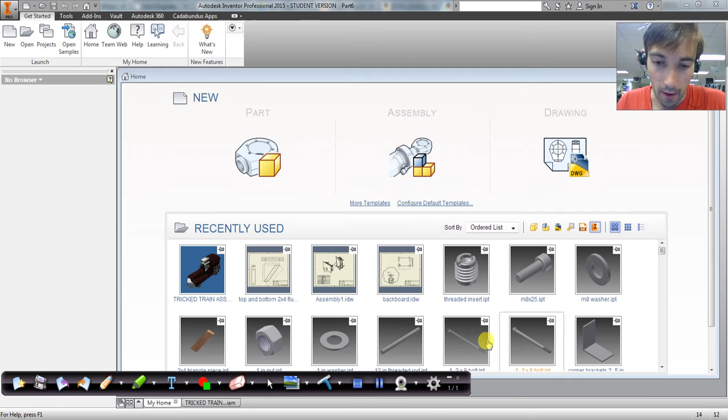Alright, we're going to start making parts for our 3D printed car. The 3D printed car was inspired by this picture that we saw in a magazine. Looks kind of fun, right? It's got a motor, belt and pulley. Maybe we could make it move around and stuff. Yours isn't going to look exactly like this, hopefully.

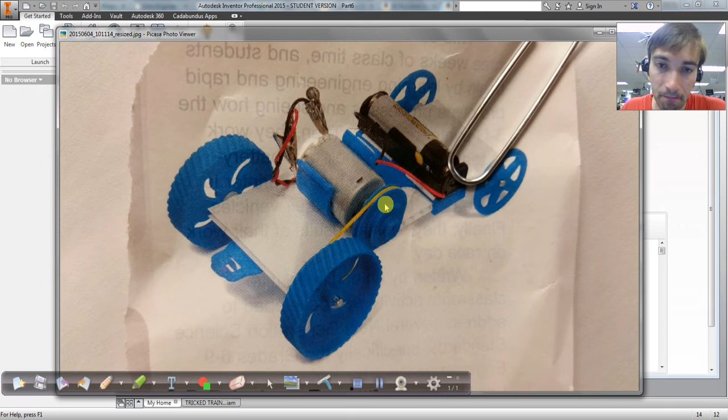But there are a couple parts that everyone kind of has the same, like the pulley, which we have these pulleys from Amazon, and let's go ahead and model those in Inventor. So we're going to make a new part. So just click on New Part, then we're going to make a 2D sketch.

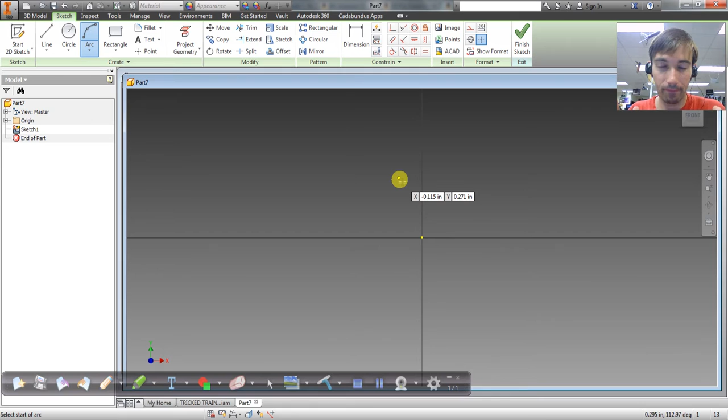Click on any plane. Now what I'm going to do is make the groove of that pulley, and I'm just going to make half of it, because what we're going to use is the mirror tool to make the full profile, the full sketch profile. And then we're going to take that sketch and we're going to revolve it.

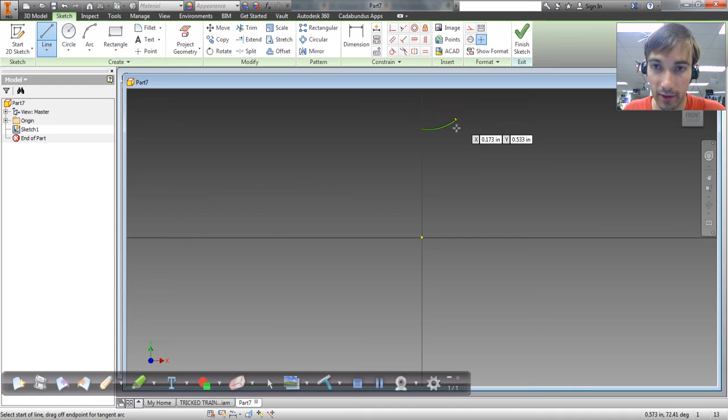So what I would do first, make sort of half of the groove where the belt goes in, so like right there. Then what I see is that it has a little lip, comes out, down, in, down, out, down, left, up. I want to make this line here a construction line, so click on construction.

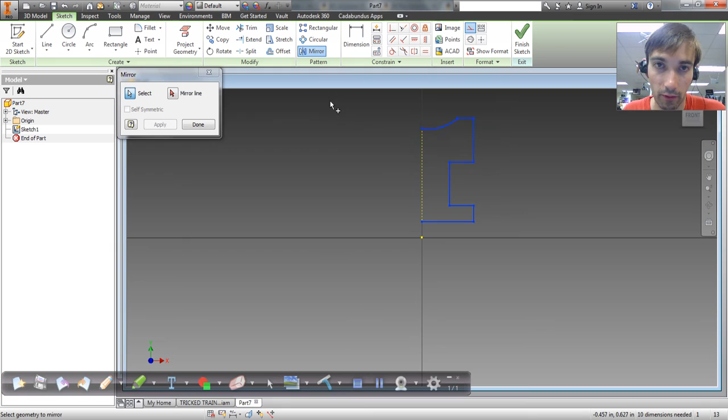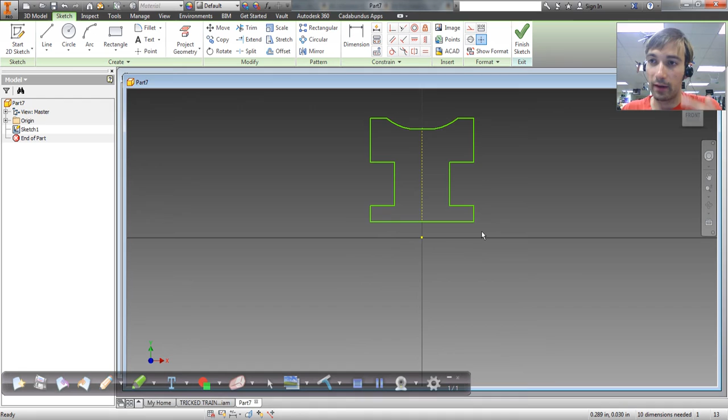Okay, and now we're going to mirror it, so click on mirror, select the whole thing, select the mirror line, and say apply, and then done. And then now what you can see is, hopefully, half of the pulley, like a heart. So imagine it being revolved about this axis. You'd get kind of a circular thing that looked kind of like the pulley.

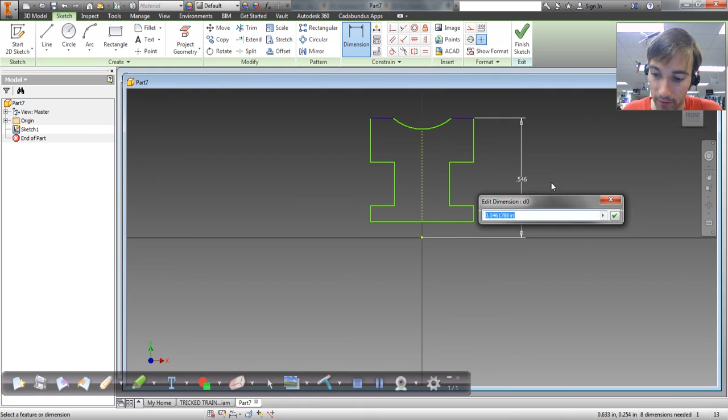Okay, first thing I want to do is make these two arcs concentric, so they act as one arc instead of two. So I'm going to click concentric, make those two concentric, and then now we'll just add some dimensions. It's a 17mm diameter, or 0.67 inches, so we'll add that. So from there to there, it's 0.67. This is the radius we're dimensioning, so we'll divide by 2.

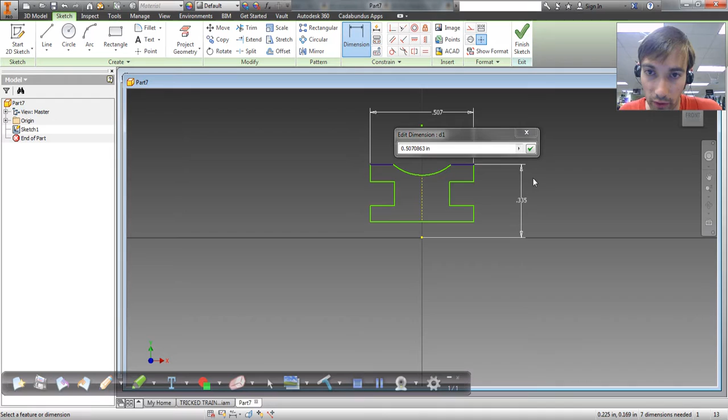It kind of flipped in on itself, so you can fix it by clicking and dragging. I just hit escape to exit the dimension tool. Okay, now you can add the width, which is 0.2 inches. Okay, that really messed it up. So I'm going to click Control Z, and I'm going to delete that dimension. Maybe it needs to be a little bit closer to the actual thing. And then we can try that one again.

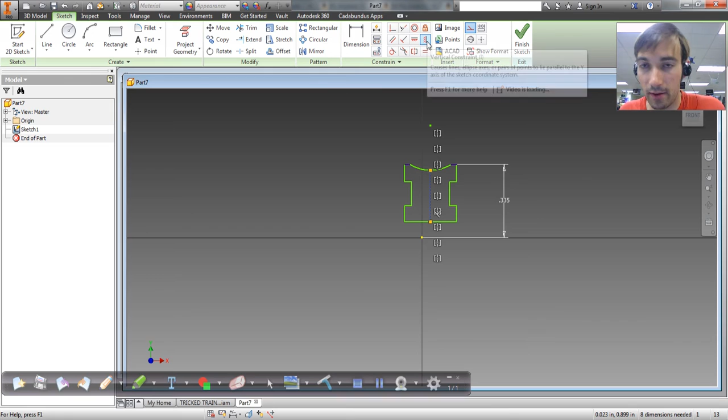You see how it kind of doesn't know where it is, left or right of the origin, the center line. Let's just go ahead and tighten that up with a constraint. Click on the vertical constraint. Whoops, I already had something selected. Click on vertical with nothing selected. Then pick the center point of the arcs, and make that just vertical of the origin. Now it'll center it about the origin. Okay.

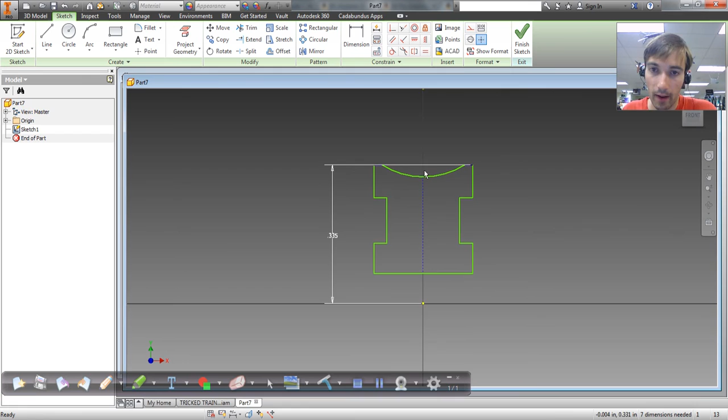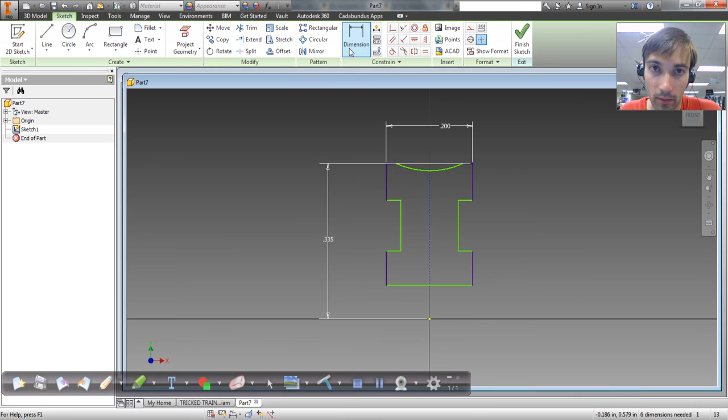Now let's try the width again. So click dimension, from there to there, 0.2, that's looking pretty good. Okay, this groove diameter, it doesn't know yet, so let's add that. It says it works for a 0.07 inch belt, so let's try making that 0.07.

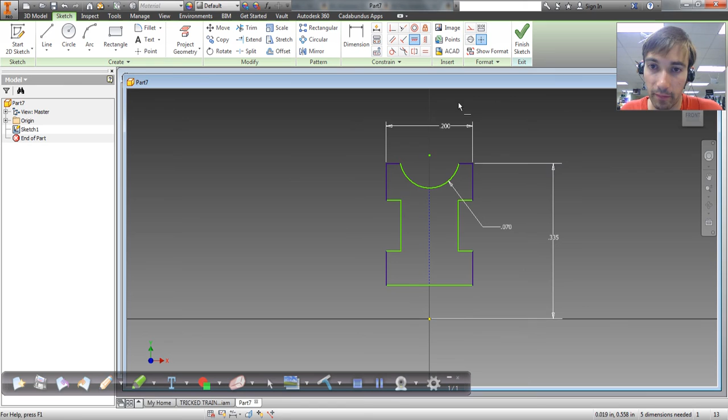It doesn't know how deep this groove is. Maybe let's make the center point of the groove even with the top of the pulley. So we'll go ahead and pick horizontal, pick that center point, and pick the edge there. What else do we need? Well, we're also given the hole diameter. It works for a 2mm shaft. So we'll dimension that from there to there. It's actually 1mm because it's the radius.

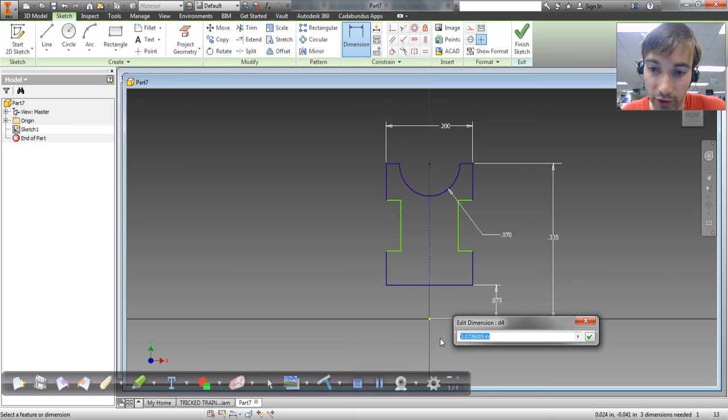So I know that if I take a number in millimeters divided by 25.4, then I get the dimension in inches, so I'll say 1 millimeter divided by 25.4. There's our 1 millimeter radius hole. These other dimensions we have to measure. Okay, I'm just gonna guess right now. So from there to there, make it 0.1. Maybe from there to there, make it 0.15. Okay, and then it's fully constrained.

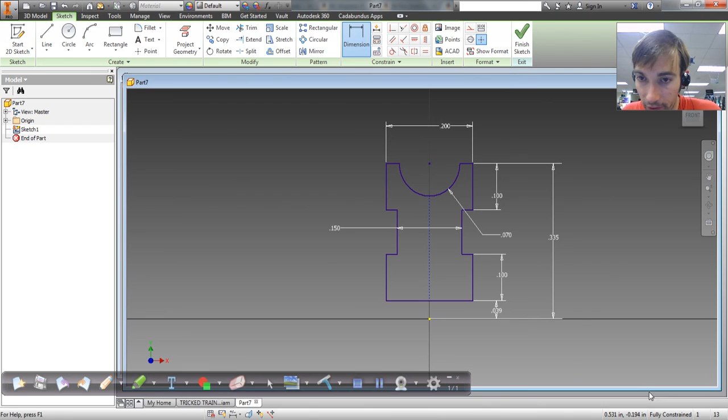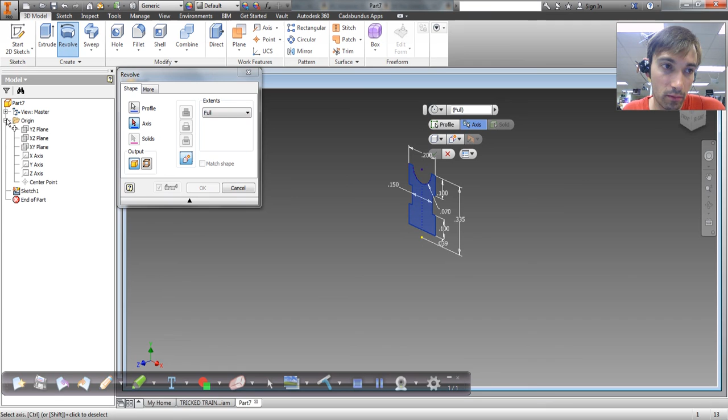So we can click finish, and now we can do our revolve. Revolve needs 2 selections, the profile, which it automatically did because we only have 1 profile in this part, and then the axis. All of our axes are invisible right now, so we have to click on the plus sign next to origin and figure out which one it is. So it's the x-axis. We'll click that one, then say OK. And there is our pulley.